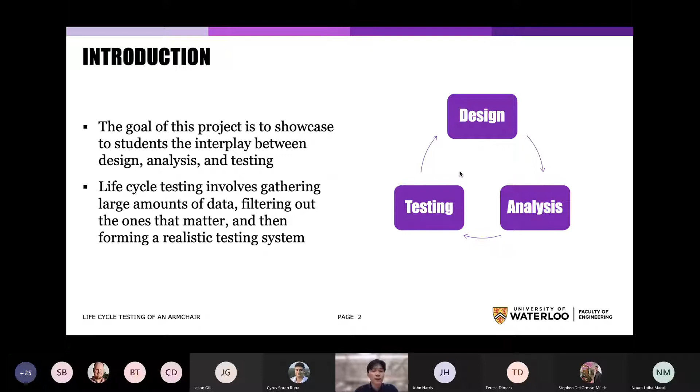So the goal of this project was to showcase to students the interplay between design, analysis, and testing. And lifecycle testing involves gathering large amounts of data, filtering out the ones that matter, and then forming a realistic testing system. So with this project, we're constantly going through a cycle of design, analysis, and testing. And over the next couple of slides, we're going to show you exactly how this project follows this process.

When we first started this project, we needed to figure out a way to design an instrumented machine that can conduct fatigue testing on the chair. And by instrumented, we mean basically rigging up the testing machine with sensors and cameras to collect data about the amount of force that's applied into the system and the amount of deflection that would occur in the chair when we're sitting in it. And the goal of this machine is to simulate as closely and as realistically as possible a person sitting in the chair.

And to define fatigue testing, that basically just means applying a load to a certain object over a given period of time in order to analyze when exactly the chair or the object would break or fail. But before we actually get started on making the machine itself, we need to take a step into the finite element analysis side of things.

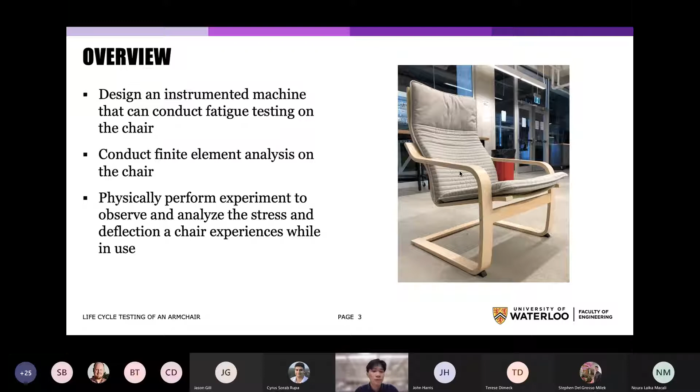So this is essentially just modeling a digital version of the chair on our computers, and then the computer would do the calculations to show us exactly the stress behavior the chair would experience based on loads that would be applied to it. And using this, we can then validate these results by physically performing the experiment and observing and analyzing the stress and deflection of the chair while it's actually being used. So I'll hand it off to Matthew to get more into the specifics of the finite element analysis.

Thanks, Johnson. So now I will talk a little bit about the importance of a digital twin in this project. There are three main inputs to the design process for this project. First, we have the geometry of the design. Second, the loading conditions that the design will experience. And third, the material of the design. And any number or combination of these inputs may be changed at each iteration of the design cycle as the design continually improves.

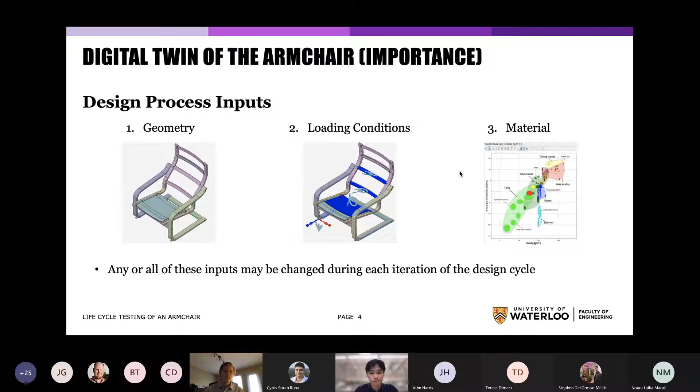So more specifically, the design cycle of this project is as follows. First, a significant amount of data is collected for a wide variety of loading conditions in a realistic environment, and this is typically a very lengthy process. Next, all of these loading conditions are simulated in ANSYS AIM through finite element analysis, allowing us to determine the small subset of the conditions that would actually cause damage to the chair over its lifetime.

And once this subset has been identified, these conditions are replicated many times to simulate the life of the chair and determine the modes of failure, specifically what parts of the chair will fail and after how many cycles. This information is then used to improve the design, whether that be updating the geometry of the chair or the material that will be used in the manufacturing.

Now, the presence of a digital twin allows us to eliminate the data collection stage entirely after the first iteration, as the updated parameters are simply input into the model and the simulations can begin to run again. This will significantly increase the speed of the design cycle and allows for the process to become automated. And as with any digital simulation, the results must be validated, and we will be doing this with the instrumentation that is shown on the following slide.

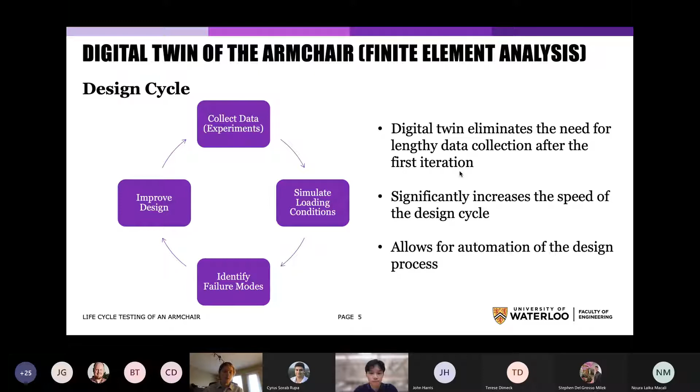But with fatigue testing and with this machine, we want to try to speed up this process and automate it. We definitely don't have 40 years of time to do the testing on the chair itself. So by using this machine, we can effectively reduce that time into just a matter of weeks, for instance, and actually see what forces would cause the breakage in the chair itself.

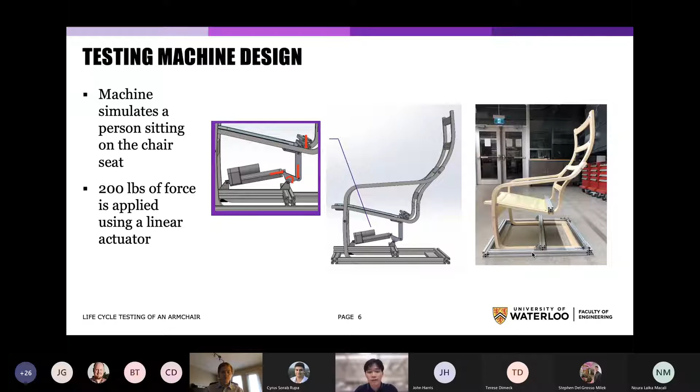So there are many different aspects of engineering that come into play in this project, in all of the design, analysis, and testing segments. Portions of this initiative can be used to develop a wide range of meaningful and engaging projects for students across different engineering disciplines. For example, we are currently working on developing a material selection project to be run in a materials course, in which students will use simulation results from the finite element analysis, as well as predefined product constraints such as weather resistance or durability, to screen a database of 4,000 plus materials down to maybe 3 or 5 viable materials that could be used in a final design.

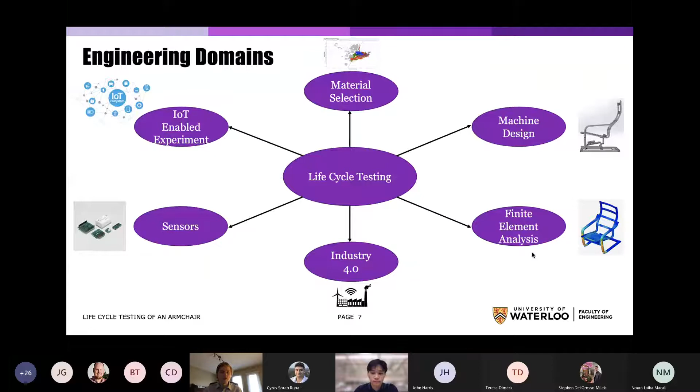Now, while we have been talking about the life cycle testing of a chair, this geometry may not be very exciting or engaging for some of the students, and thus we have also been developing a project that centers around a more complicated, engaging, and interactive geometry, and that is a bicycle frame.

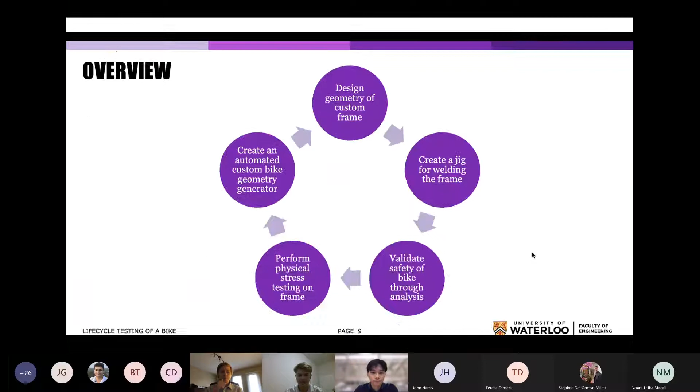Thank you, Matthew. My name is Mizzen, and I'm currently in civil engineering, and I've been working alongside Johnson in our project, which is life cycle testing of a bicycle. The purpose of this project was to design the geometry of a bicycle frame by utilizing online resources to learn as much as we possibly could about the design of bicycles and all the parts that are included in the manufacturing of a bicycle. However, to build a bicycle frame, we would need a jig to hold our frame in place so that it could be welded together.

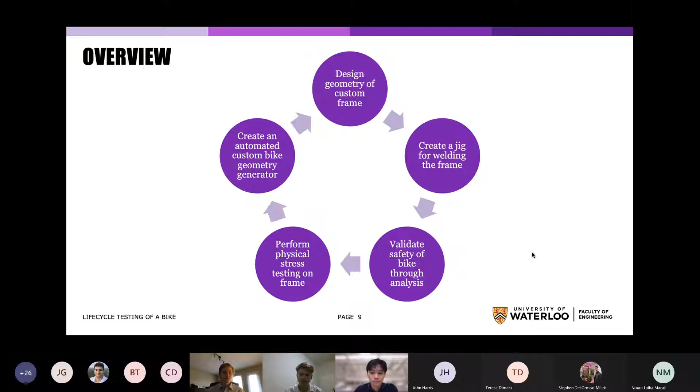So we had to design a jig with maneuverability to fit bicycle frames with different geometries, which I will get into later. To ensure that we did not waste our time manufacturing a bicycle frame that would fall apart the first time we rode it, we tested it to validate the safety of the bicycle through computational analysis so we could then perform physical stress testing on the frame once the time came. To conclude the process of going through the design, manufacturing, and testing of a bicycle, we wanted to elevate this process by creating an automated custom bike geometry generator so that anyone could build a bicycle frame by inputting their geometry, and a bicycle would automatically be designed and generated to fit them.

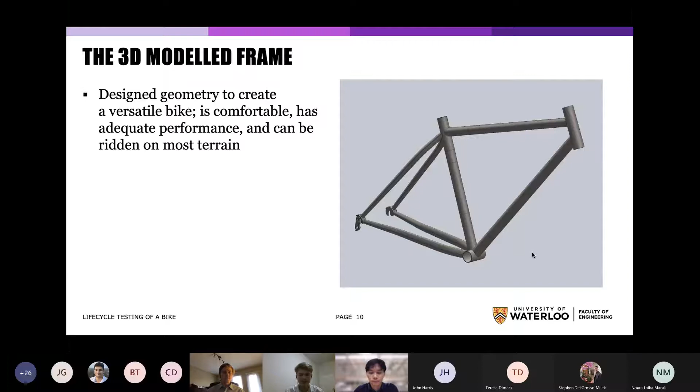Here we have a picture of the 3D model of our frame that was developed in SOLIDWORKS. The design of this bicycle frame was intended to be versatile so that it's comfortable, has adequate performance, and can be ridden on a wide variety of terrain. This was done by carefully selecting the proper angles for our tubes. As well, we ensured this bike would fit myself and Johnson despite our height differences by ensuring the length and height of our tubes were adequate, so that neither of us would be reaching too far or be hitting the ground while riding the bicycle.

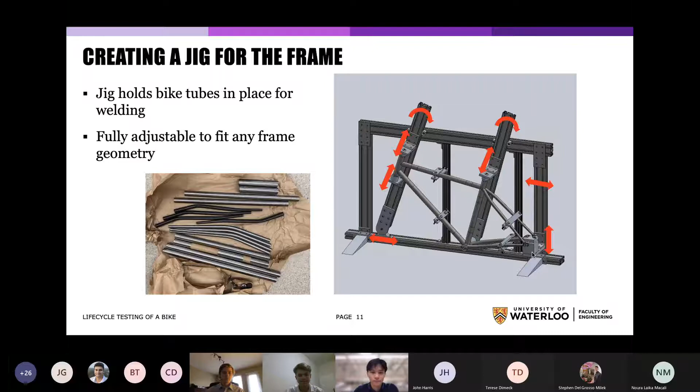So this is where the life cycle testing part of things comes into play. Like Connor mentioned before, we want to make sure that this bike frame doesn't fall apart when we're riding it, because that can possibly lead to people injuring themselves or breaking a few bones, and we definitely don't want that. Similar to the chair testing project, we also want to do some sort of fatigue testing on this. But first, we got to do a finite element analysis of the frame.

So a chair is a static object, and the loading conditions on it are quite honestly fairly boring, because most of the time the loading condition would just be simply someone sitting in the chair. But a bike is a dynamic object. It's going to be subjected to much more complex and complicated loading conditions. And some of these we try to model as realistically and as accurately as possible in our finite element model.

And some of these loading conditions include riding the bike normally, if the front wheel were to hit a wall, riding while standing on the pedals, and abrupt front and rear braking in cases of an emergency, for instance. So just to reiterate, the frame finite element model is just focused on seeing the stress behavior in the frame itself, and we're not necessarily worried about the FEA of the wheels and fork, for instance, which would just be holding the front wheels.

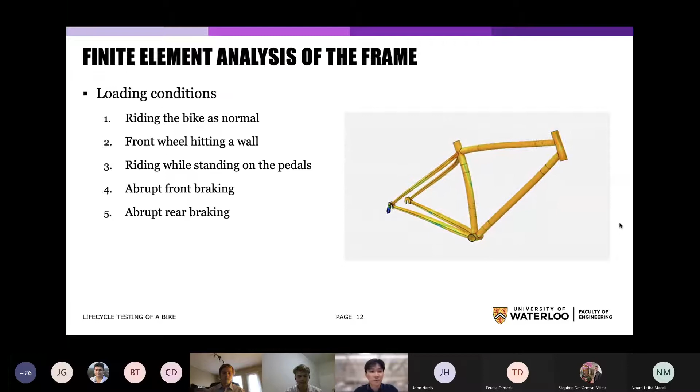And fortunately, through our validation we can conclude that the bike will definitely not fall apart when we're riding it and should be able to hold up reliably. So I'll hand it off to Jared to talk more about how we plan on auto-generating bike frames to custom fit any person and any body size.

Sorry, I guess the wrong screen is being shared now. Okay, can you see the presentation now? Yep. Okay, so hi, thanks Johnson.

I'm Jared Elliot and I'm in 2A Mechanical, and I'll be talking about the adaptive design process. So basically that is being able to take in user inputs to create a specific model for a project. So after creating the general design for the bicycle frame, our next logical step was to make the key design elements user adjustable to ensure the end product is fully optimized. To achieve this, we created programs to intelligently automate our design.

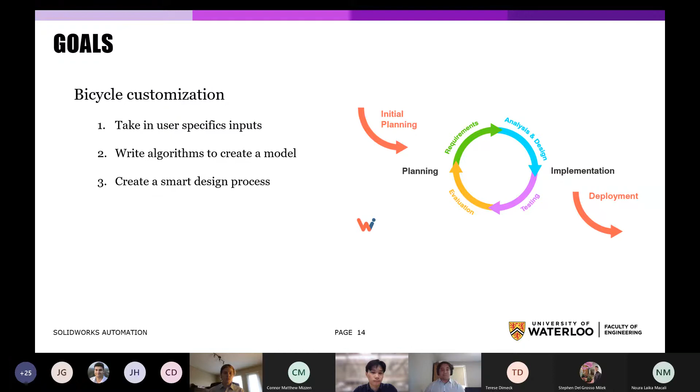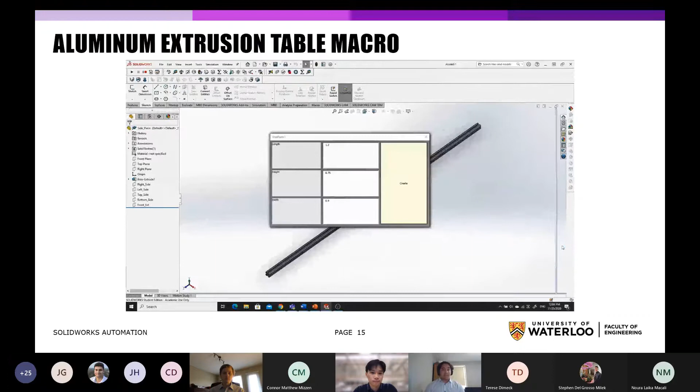So we needed to take in specific user inputs, write algorithms to create the model, and then our goal was to create a smart design process that can take in information from a test or simulation of a design, and with preset parameters incorporate that into our future designs. The first step we took towards this was to create a table. So this has simple geometry, and in this video it takes in the length, width, and height and makes a custom table. The adaptive design program can then be verified using the digital twin method mentioned earlier, where it can be analyzed for structural and fatigue performance relative to a set of requirements.

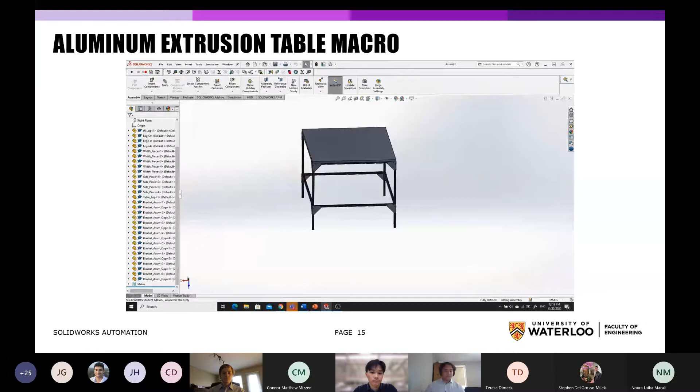And now, with the fundamentals we learned from the table, something of greater complexity can be achieved using the Industry 4.0 ideas. With the bikes, the first step would be to take the general user anatomy measurements, leg length, arm length, height, and weight, to get a model that is scaled to a specific person. To take this further, looking at more complex user inputs like the force on the pedals could help determine other design parameters like gear ratios to maximize efficiency.

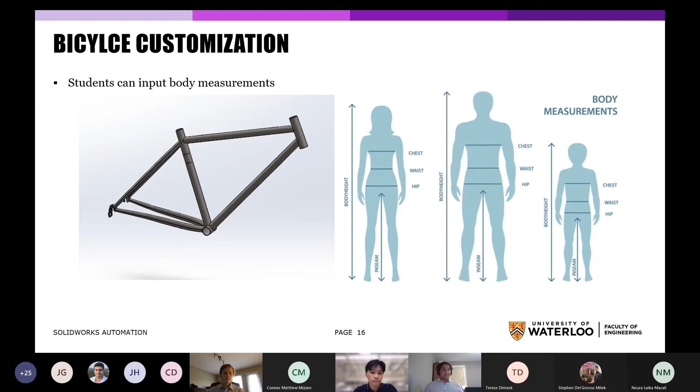Incorporating these algorithms and automating the process would also increase the speed of production and increase the quality of the product being made. Other things that we've also worked on is some artwork. So we've created braids, and it can also be expanded to, let's say, optimize PCB heat transfer. That's the end of the presentation that we have today. If there's any questions,